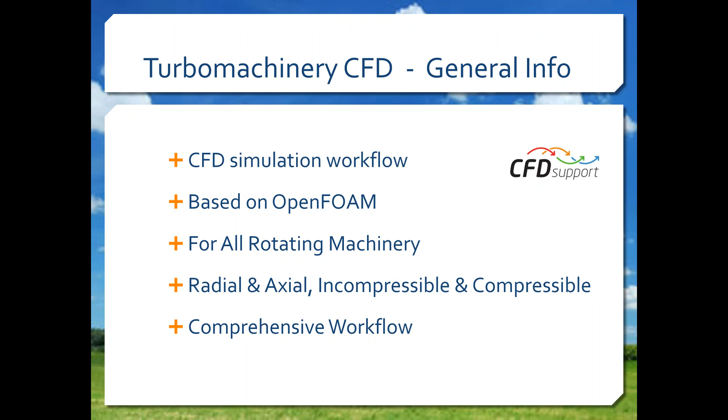Turbomachinery CFD is a unique software based on OpenFOAM. It was designed for CFD simulations of all standard rotating machinery such as pumps, fans, compressors, turbines, water turbines, both radial and axial machines, both compressible or incompressible fluid flows. Turbomachinery CFD is a complete CFD workflow that covers all the engineering steps from the pre-processing over the simulation run to the very detailed post-processing of the results, and it's independent of any other software, so it's very comprehensive.

May I ask you, Wolfgang, to move to the next slide? Thanks. So I will quickly give its unique value proposition. Here at CFD Support, we believe Turbomachinery CFD is unique, at least for these reasons. Number one is Turbomachinery CFD has no licensing policy, which means our clients can keep Turbomachinery CFD forever, and they can use it for an unlimited number of users, jobs, or cores, and that gives their investment in Turbomachinery CFD a permanent value.

Number two is Turbomachinery CFD is fully automated, which means all the workflow from the initial data to the final engineering results can be run by a single command or a single click. And all the process is done automatically, and for this reason Turbomachinery CFD is extremely effective.

Number three is we deliver extraordinary technical support. We are proud of this service because we keep a custom approach to every customer. We really deal with every issue that comes, and we are very flexible in it. So we never leave behind any issue from any of our clients, and we are very prompt in it. And we support our clients even in matters outside of turbomachinery like numerical mathematics, physics, CFD, IT, or even software engineering.

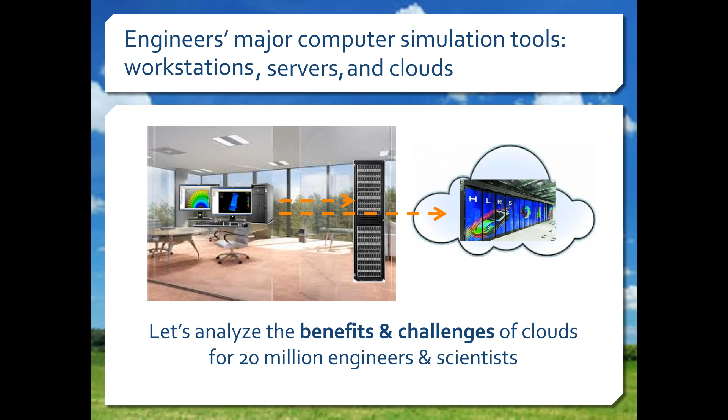Okay, so the next two slides are about the benefits and the challenges of using clouds. A major benefit of cloud, obviously, is that you have much more computing resources available than what you have in-house. So you can access an almost infinite number of nodes, cores, CPUs, and so on, and especially also memory. It is on-demand, pay-per-use for one hour, one day, one week, one month, depending on your project size, on your job sizes, and it can be pay-per-use or subscription or annual. So whatever you choose, it is really up to you and up to your demand.

And the resources can scale dynamically, so you can go from few cores to many cores and back depending on your needs. And the nice thing is that you have the choice. You can select multiple cloud providers depending on your requirements, for example, also for hardware, for the architecture, tightly coupled, loosely coupled, algorithms, solvers, everything you find these days in the so-called high-performance computing clouds. These are clouds which are especially set up and tuned for heavy simulation jobs. And then we summarize all this usually with the buzzwords better, faster, cheaper, when you do it right. But we definitely can help you, can support you how to do it better, faster, cheaper.

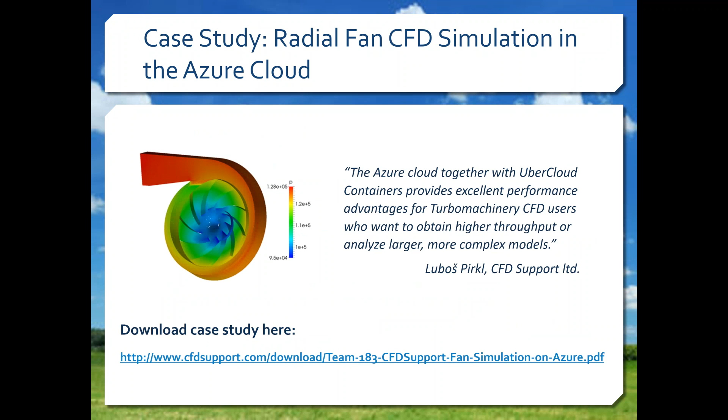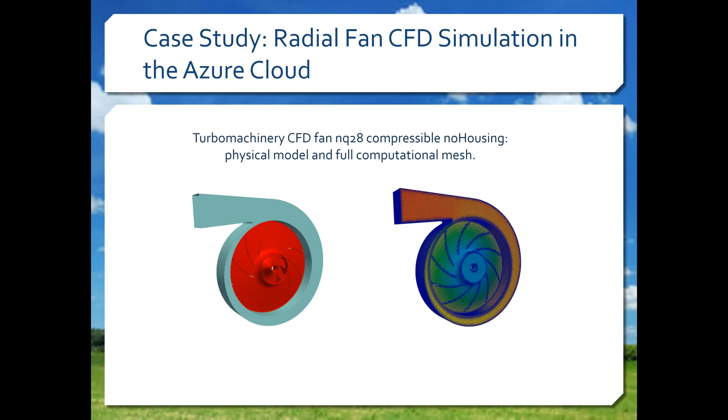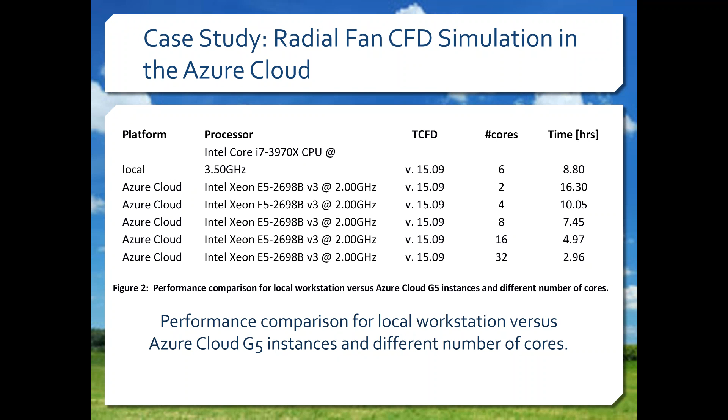Okay, so let me run quickly through that. I don't go into detail here because Lubos will have a similar example with his demo. You see there is a Turbomachinery CFD, specific fan, compressible, the physical model versus the one with the computational mesh. Very often you do some types of benchmarks, which have been done here as well. In this experiment on the Azure cloud, we increased the number of cores from 2 to 4, 8, 16, 32. And on the right-hand side, you see an almost linear increase of the performance, which means reduction of the runtime of this specific application.

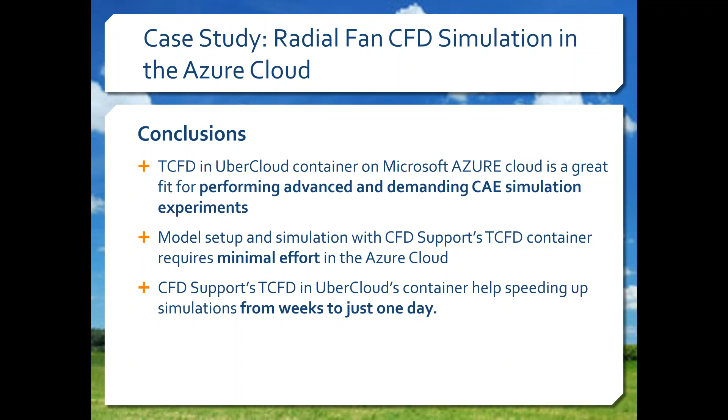So we are very close to the live interactive demo from Lubos. What you will see is when you go to the UberCloud marketplace, as I said, the engineering shopping mall, there is a software area, and in the software area there are about 20 different software provider stores, and one of them is the store from CFD support. So when you click on that store, you enter the store and you see these products on the shelf, so to speak, waiting for you.

If you look at the second line of products, you see Turbomachinery CFD with technical support, 8 cores, next is 24 cores, next is for 1 day, and the other one is 24 cores for 5 days. In the prices which you see there, everything is included. So not only the software; the larger part is obviously the hardware. In the cloud you have to pay for the hardware. Someone has to buy it for you, host it for you, and do all the support and maintenance for you. So this is all included.

That's what we call total cost of ownership. But you don't own the resources. You don't have to buy them. You don't have to go through this very cumbersome acquisition of resources, go to your bosses on your knees and ask for additional resources. Here you pay via credit card, for example, or ask for an invoice, and then you are ready to go. Okay, so let's see.

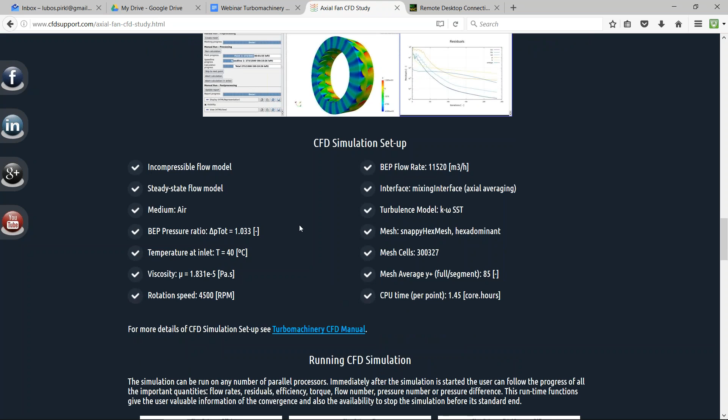The geometry was designed in the software CF Turbo, which is German software, really great software where you can design all the turbomachinery machines, very smooth, very quick, very efficient. From it you can export to Turbomachinery CFD, which is the simulation tool we are speaking about. On this web page you can see all the details: the physical settings, the dimensions, the main features and the points of this test case.

So I'll go back to my window with the workspace in the cloud, and I will start working. I'm in the cloud container right now in my web browser. I'm an old school guy, so I will open the terminal, and from the terminal I will open ParaView, and I will work from ParaView, because 100% of the workflow of Turbomachinery CFD is done in ParaView. Turbomachinery CFD is installed already. It was compiled a special way, so ParaView can view special plugins of Turbomachinery CFD. So I start using Turbomachinery CFD inside ParaView.

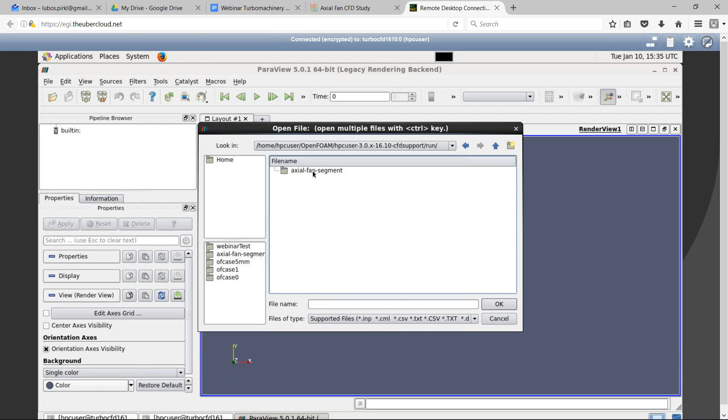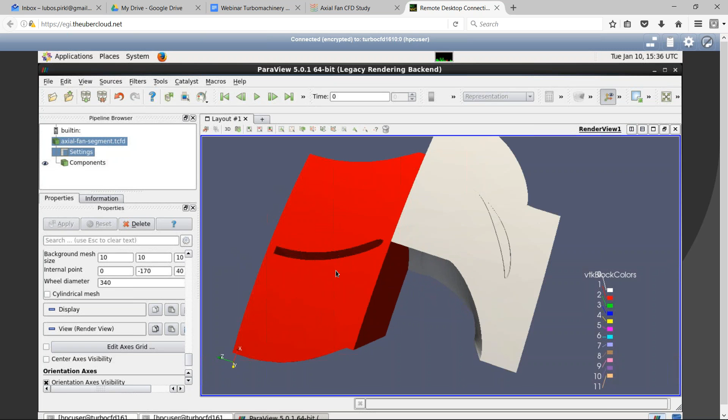So I will open the configuration file of the case, which is axial fan, and click apply. I can close this extra window, and it gives me the surface geometry of the case. You can see it's very simple, it's periodic, so I will compute only a periodic segment of the axial fan. There will be one rotor blade and one stator blade.

I can do the basic settings, or I can check the basic settings. It's in the panel settings. On your left hand side you can see all the standard settings of the CFD solver and the simulation: number of components, boundary conditions, physical settings, media settings, turbulence model settings, and of course the mesh settings. The test case is already preset, so I'm satisfied for now with the case settings.

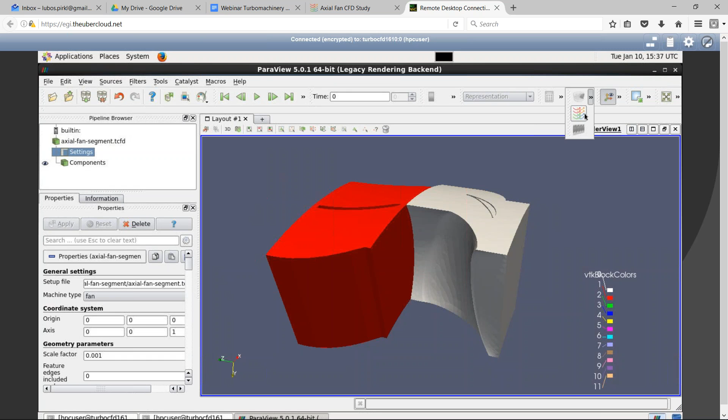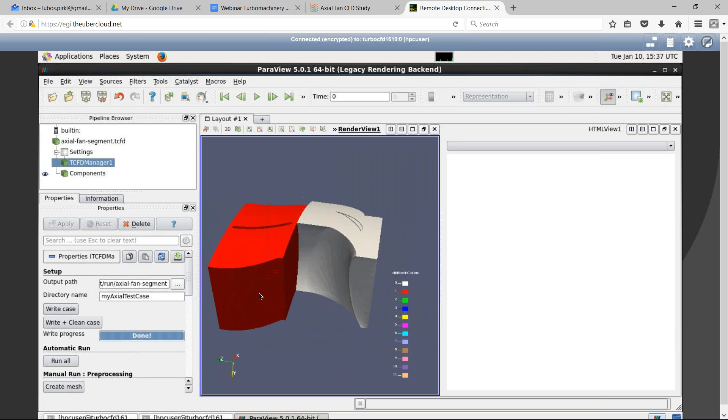So I will switch on the next filter, which is called TCFD Manager, a special filter which allows me to run Turbomachinery CFD cases. I will name my new case, which will be written down, so I can call it my axial test case, for example, and click apply. First I write the case down. Right now a new folder called my axial test case is being written to the hard drive, in the cloud of course, and it's my case for now. I can edit it anytime. It's fully compatible with standard OpenFOAM.

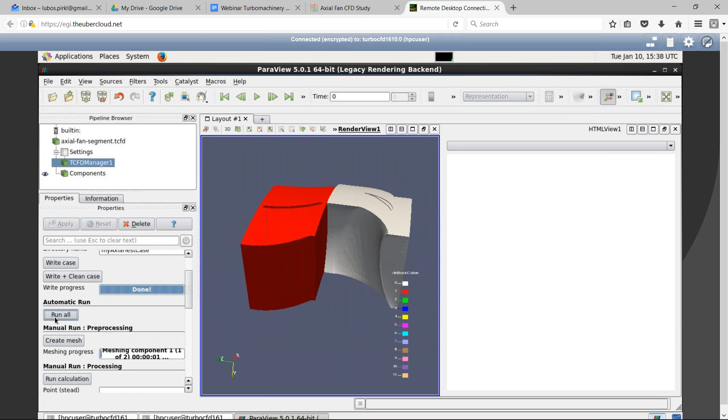There are some special extensions which are in fact called Turbomachinery CFD, and right now I can do all the steps one by one. I can create the mesh, I can run the calculation, I can watch the results, or I can do everything in one by clicking the button run all. So I click the button run all, and this simulation is set to be very quick. It will be computed in about 1 or 2 minutes. So now the meshing process is running.

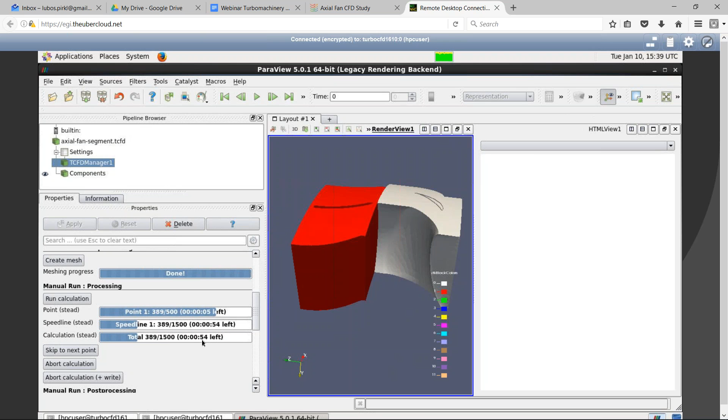The rotor blade was meshed. Now the stator mesh is being done. Now the complete mesh is being done, and now the simulation is starting, and it already tells me that we are simulating one speed line and three characteristic points of this speed line, and the simulation is very, very fast. We are simulating on 4 cores, all of them running at 100%, and the simulation is going to be finished in 40 seconds. So I believe we can wait for these 40 seconds.

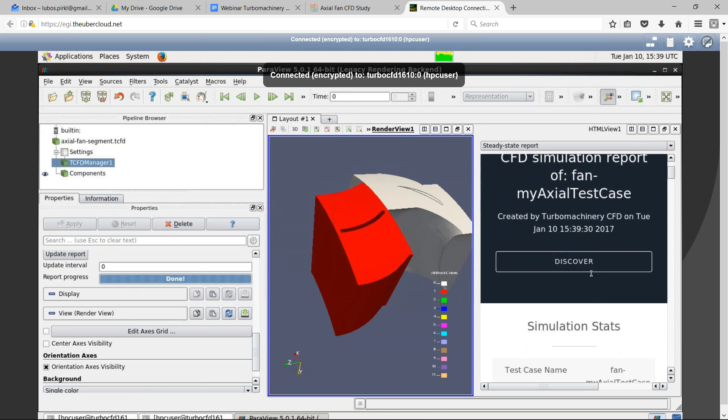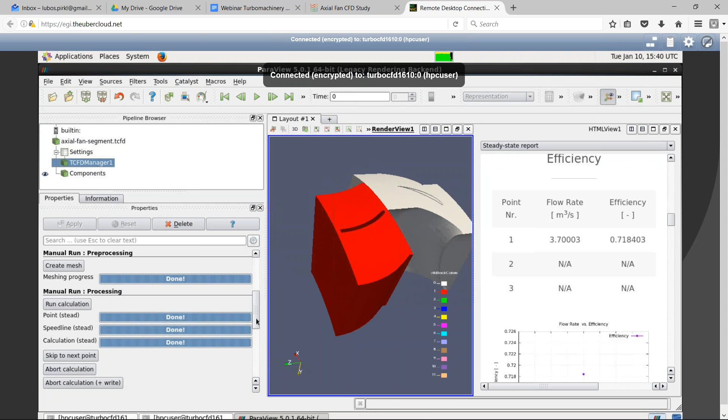Anytime during the simulation I can click, for example, update report, and watch the results already, because a typical simulation may take minutes or even hours. So you can watch the results anytime. What's important, any simulation in Turbomachinery CFD has its simulation report, which can be updated anytime. You can watch the results anytime, and you can, for example, change the settings during the simulation run and act accordingly. So the simulation is done already.

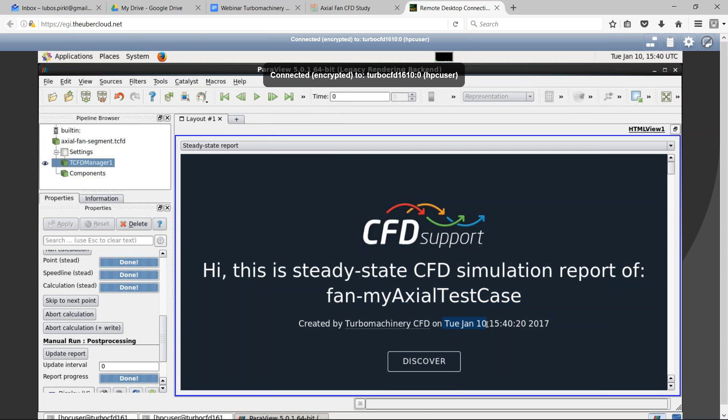I will take a look at the results. I will update the report once more because I have changed the resolution of the report, to have it very nice. So this is the report of the integral quantities. You can see it's really my axial test case, which is the name of my new case. The report was created on Tuesday, January the 10th. It's right now, so I can watch the results.

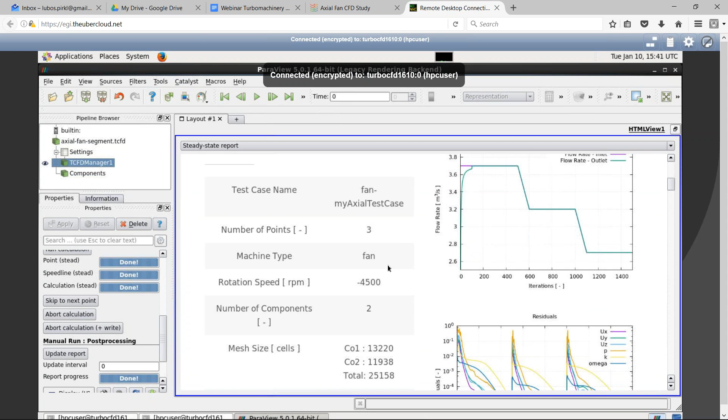Here are some simulation statistics: the name of the case, number of points simulated, number of speed lines, rotation speed, number of components, mesh size, Y plus statistics, and wall clock time. The complete simulation of 3 points took 1 minute and 16 seconds.

So it was very quick on 4 cores. There was air in the compressor, and the fluid flow model was incompressible. There are also flow rates and residuals.

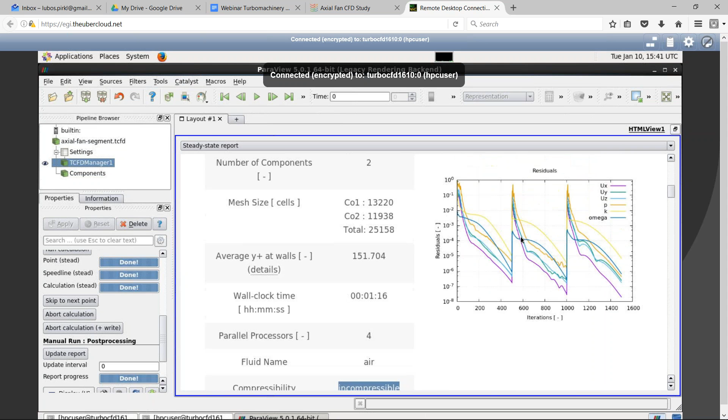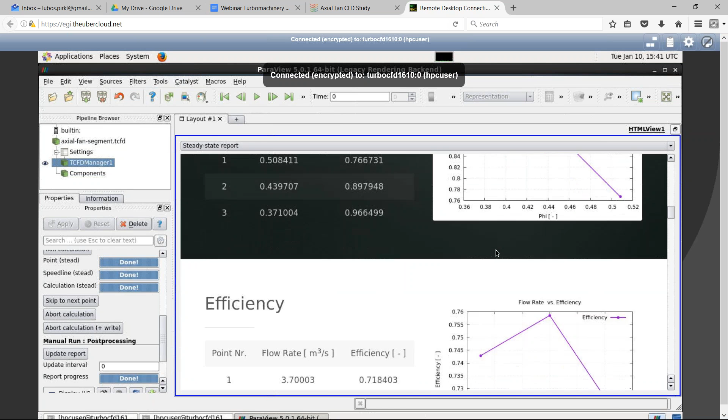As an experienced CFD user, I can see the results are pretty good. There's a fan characteristic, which is the phi-psi characteristic. Engineers who work with fans know very well what it means. There is also the efficiency—everything is as expected.

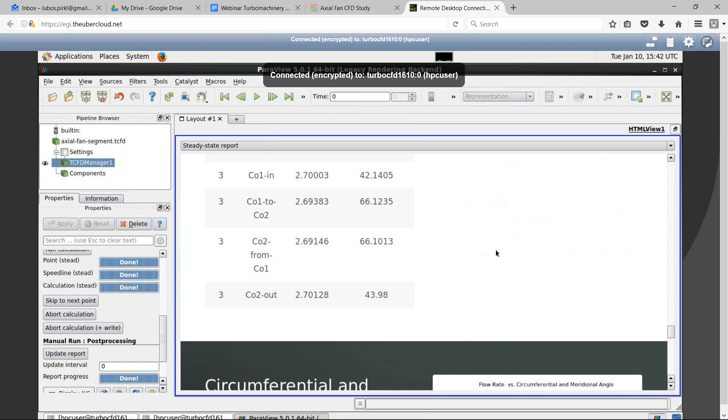So this was my simulation, and now I'm watching my report of total integral values like torques, total pressures, losses, velocity angles, meridional angles, and circumferential angles. These were the integral results.

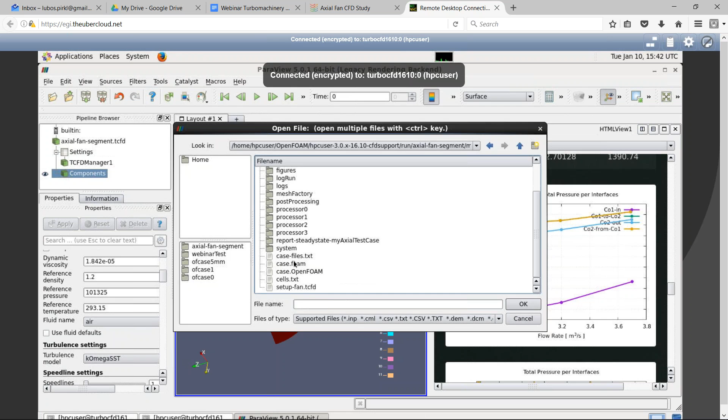What I can also do is watch the visual results. So I will open my axial test case, which is this one. I will open it and jump to the latest time.

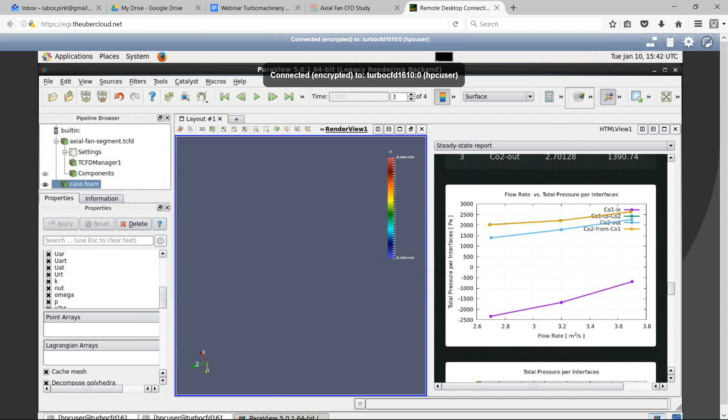I also switch off the original surface geometry. I need to bring it to the front, and I also need to rescale the colors to the visual spectrum. Maybe I can maximize it.

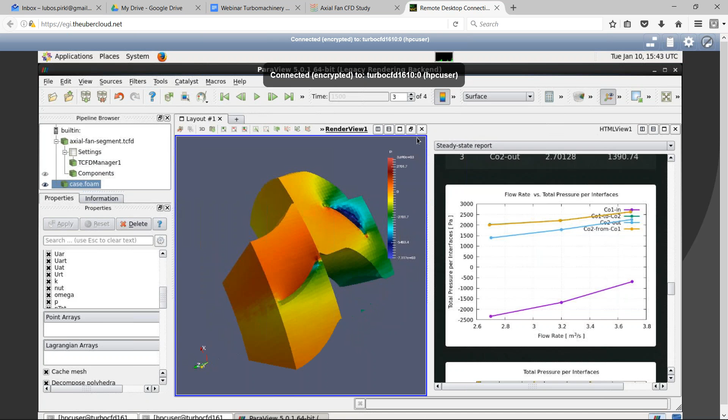So this is my visual results. I can do very special post-processing in the TurboBlade post, but I believe that's not a matter for today's example. I can only do some small post-processing like filtering.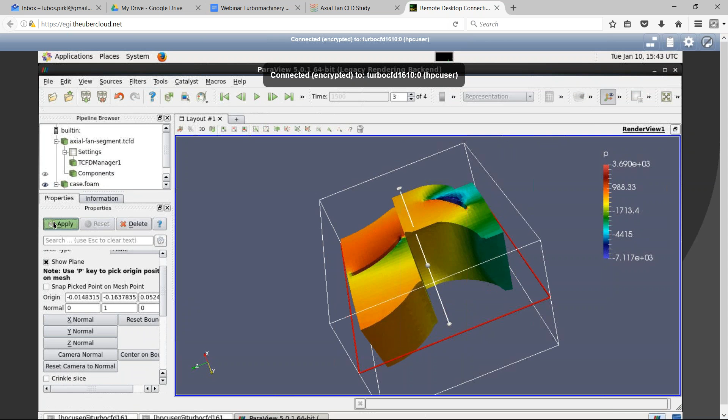For example, I will do a slice. I will click on the slicing filter. I need the Y perpendicular plane.

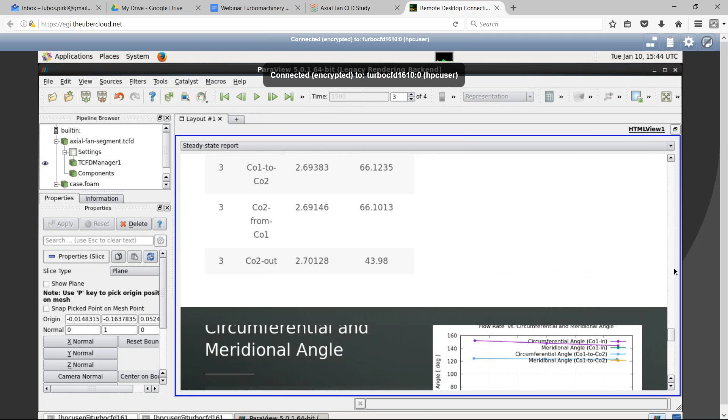So for example, these are my visual results of the rotor blade and stator blade, and these are my integral results. So the simulation is done.

It's very simple. I repeat, my main point is that the workflow on the cloud is exactly the same as on my personal computer—I only work from a web browser.

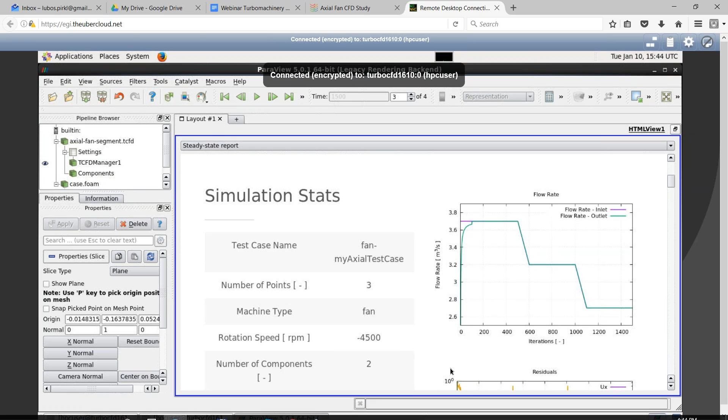Wolfgang, may I ask you, would you like me to show something more, or is this enough for the example in the cloud?

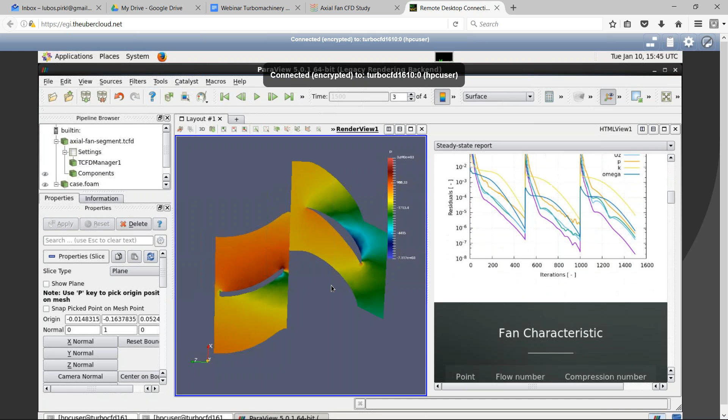I'm always very impressed because this is interactive, and you basically showed the whole workflow—how your work flows from your desktop to the cloud into the container, having all your data there, the geometry, the physics, the application, and then getting the results back. When you move your mouse to rotate the picture, it seems almost in real time.

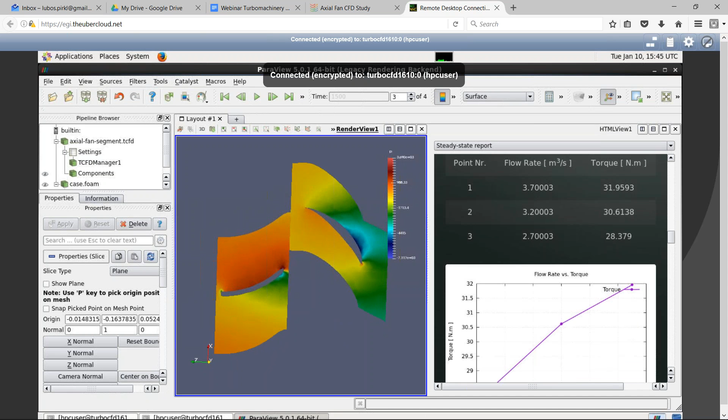I already see one question about the size. This gentleman is asking for the number of cells you've used in your geometry here. It's very few—I will show you the statistics.

The rotor part had only 13,000 cells, and the stator part had about 12,000 cells, so altogether about 25,000 cells. The model is very small, very tiny. But what's funny, from experience, small models many times have results as good as big models.

This is amazing compared to many-million-cell models—that's special CFD behavior. If you compute on a very fine mesh, the efficiency increases, and if you add another boundary layer, the efficiency decreases. These effects come together on very big, nice meshes. But on rough meshes, these phenomena fight each other, and with a very small and fast simulation, you may in many cases get the best results—even better than with very big models of, say, 20 million cells. That's a paradox of CFD.

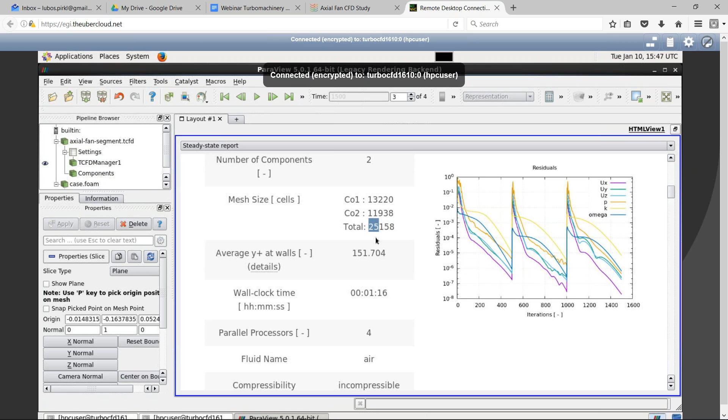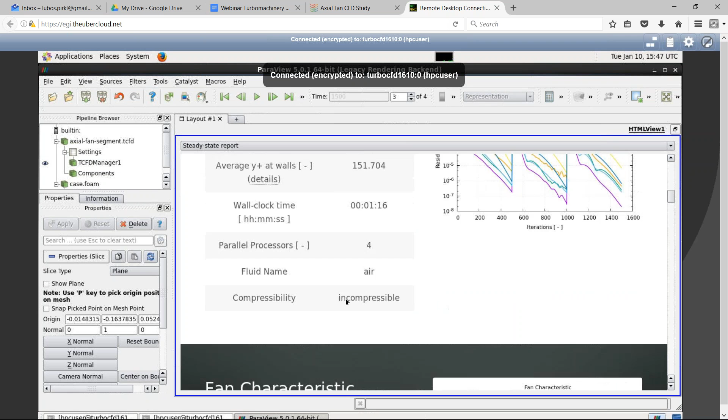But again, if you want to simulate a full rotor in time-dependent 3D, including turbulence models, then you certainly need finer meshes, and these run much longer than what we've seen reduced from hours to minutes, for example. Of course—so, excellent.

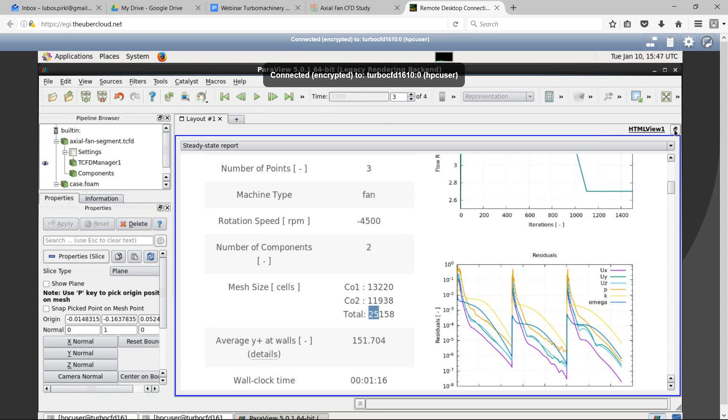There is a follow-up question on that which I will get back to later. But can you hand over the moderation role to me again? Of course I will—I'll make you a presenter right now. Here you go. Which you did, yeah. I saw it, thank you so much.

So that was my last slide, which I showed right before you did your demo. Let me continue. This is the last slide already, and then we come to some of the questions. So what is now your turn, so to speak?

The next step could easily be a trial, which is you can run your own TCFD application with the TCFD code, which is sitting in the container waiting for you on a cloud. I think that we do the trials on Advania in Iceland. This is a Hewlett-Packard supercomputer, hosted especially for cloud services. So for a trial, you can use 24 cores for 24 hours, for example.

You have seen it in the CFD support store already, which we showed previously. It has the latest Intel hardware, and included in that little package is support from CFD support on the CFD side and support from UberCloud for all the cloud matters. The nice thing is that for this special offer, you get full support on the CFD side, the hardware side, and the container side. So we basically take you step by step to the cloud, help you set it up, set your application up, because the software is already there. As we said, you have to upload your data file, and then you can start and run several applications, test it, do benchmarks, whatever you can achieve in 24 hours.

I'm sorry, I will take back the presentation. Okay, I believe you can see my screen now, and I will go back to the command line on the computer. So I'm still in the cloud, and I will open the file manager. I personally prefer Midnight Commander, and I will move to my run directory where I have this axial fan tutorial.

The case we have run right now is called my axial test case. So I will open it, and people who have ever used OpenFOAM can immediately see it's the typical OpenFOAM case where you can see there's a 0, some results in the directories. By the way, those are the 3 points we have simulated: constant and system.

And of course, Turbomachinery CFD is very advanced software for turbomachinery, so it creates many other directories where it stores the data which you can further analyze.

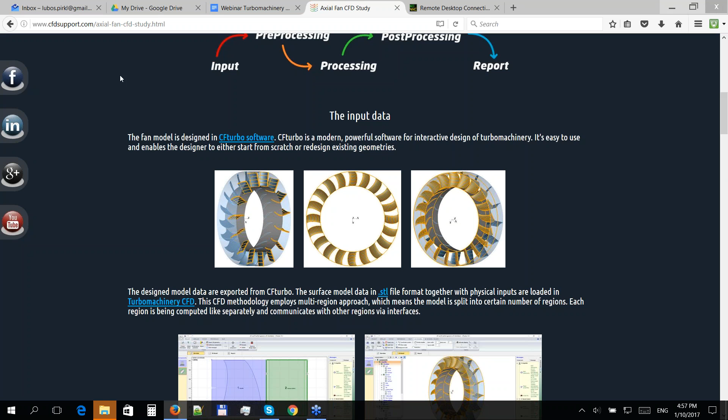There is a question about cloud licensing for any kind of ISV software, like yours. As we already mentioned, there are different models, and Aniko is asking especially for one ISV which has elastic licensing, so in fact yes, you can use your existing license.

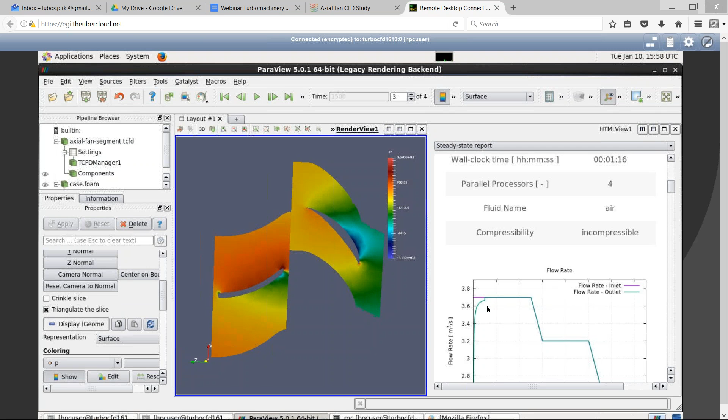You want to talk to your software rep, where you got this license from. It is almost brand new, but yes you can do it. Every ISV has a little bit different licensing model for the cloud. So ideally, either you ask us - I think we know all these differences across the different ISVs - or you ask your software provider directly.

Scrolling down, there is another one: I have an application that involves thermal transfer to a rotating water-cooled roller. Could this be modeled? It has no turbo exactly... I don't know.

Did you understand, Lubos? I'm a little bit behind because I did something. Okay, I'll read it: I have an application that involves thermal transfer to a rotating water-cooled roller. Could this be modeled?

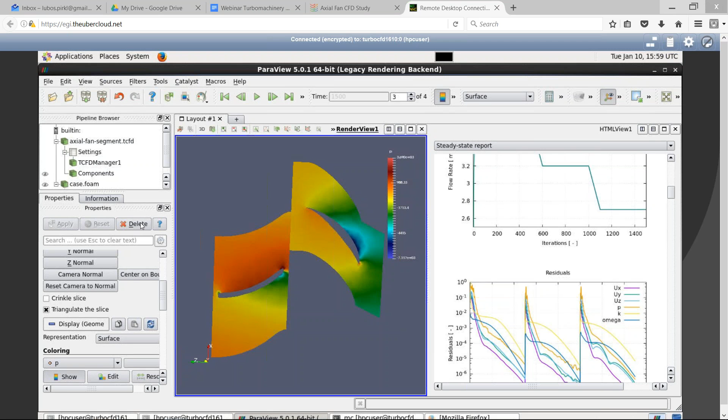Yes or no? I think this is very special. The asker is Gerard O'Boyle - I will ask you, Gerard, send me an email, and I will deal with this seriously afterwards, after the seminar, because I would need, for sure, some more details about this.

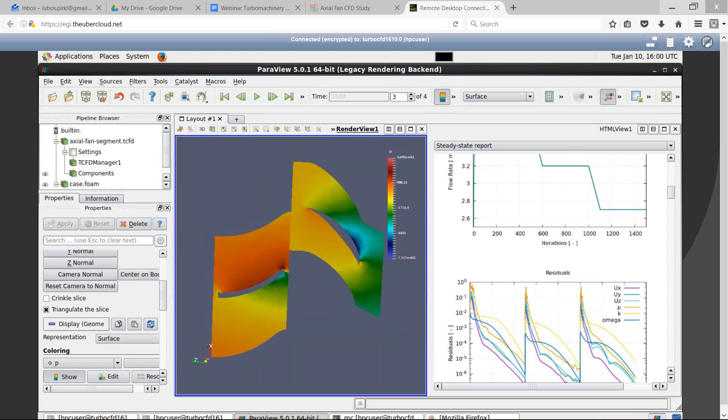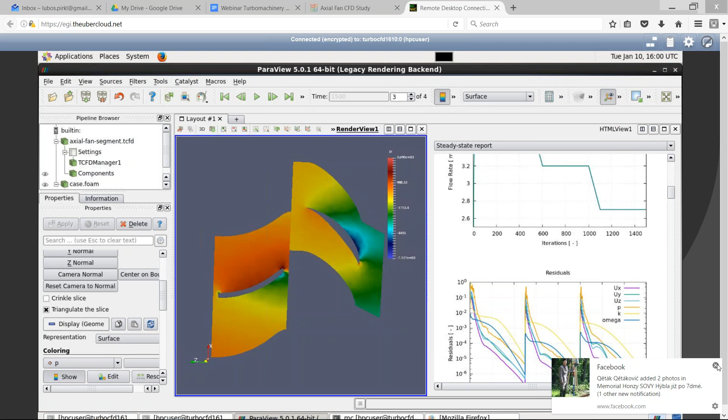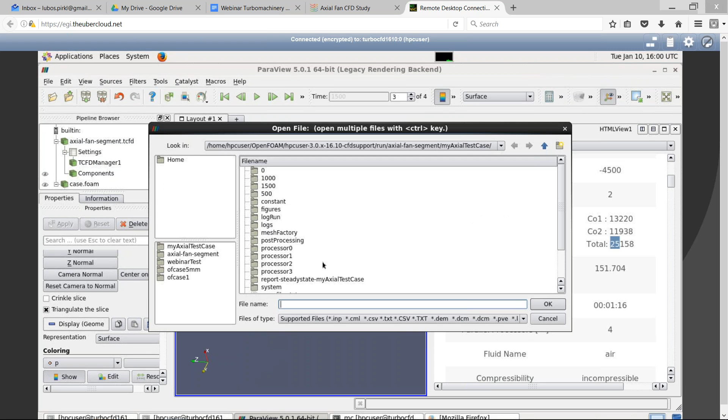Great, so one last question: the case for the webinar participants offer, must it be about fan turbomachinery studies only? That's a good question. So this offer certainly was meant to be for this specific TCFD application, but if you want, for example, to try a general OpenFOAM application, CFD Support's OpenFOAM in a box, we also have that containerized. We already have a few trials running because we had a webinar about this in late November, I think, so we still have a few dozen trials there up and running, which will end in February.

But you can join. So if you think you have a nice OpenFOAM application which is not really connected to turbomachinery, still send me an email, and we definitely want to help you.